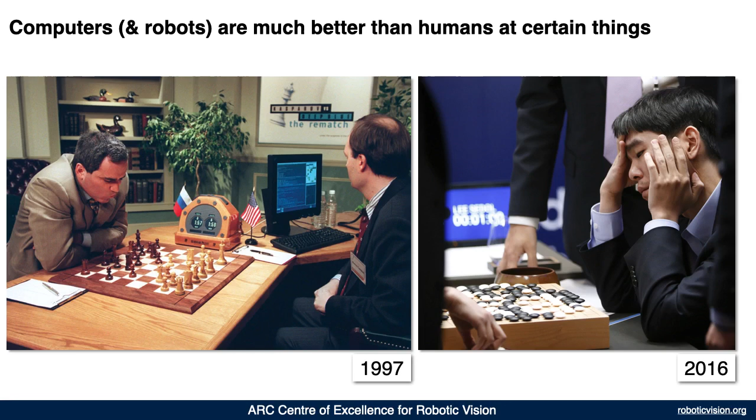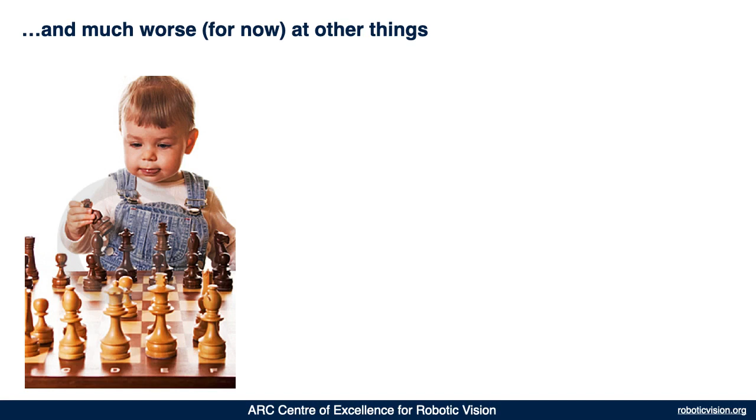If we look objectively at what computers and robots can do, we know for certain tasks they're awesome. For example, in classical board games, classical hard AI problems, they're way better than human beings at the game of chess, and more recently at the game of Go. But when it comes to tasks like hand-eye coordination, manipulation of objects, as shown here, robots are way inferior to very small children. Even if we could create a robot system to do this particular job of picking up these wooden chess pieces, if we then showed it different kinds of chess pieces, it's very likely that it would be confounded. It wouldn't have the ability to generalize, and that weakness is particularly apparent in its visual perception system.

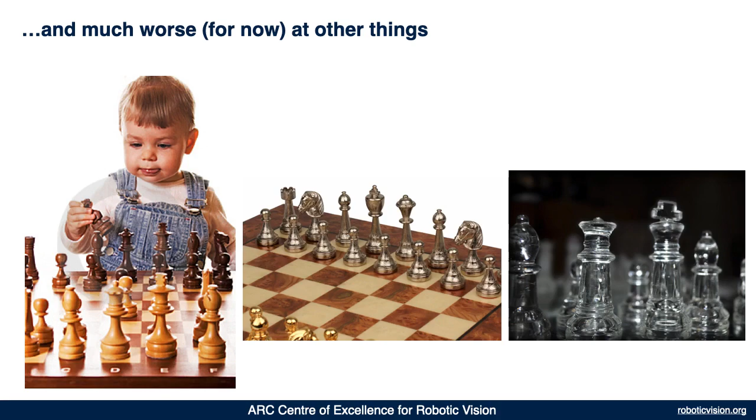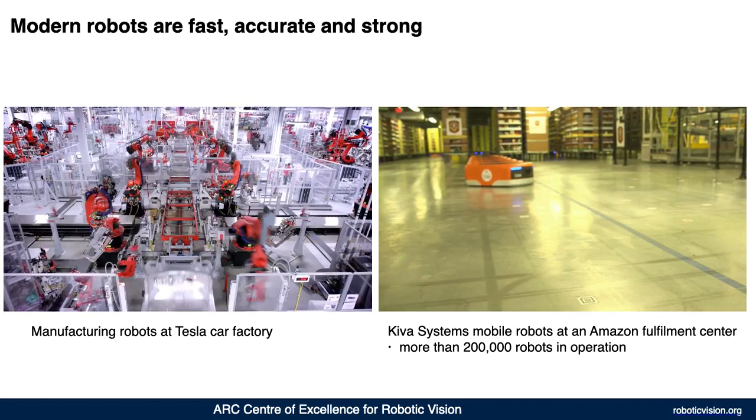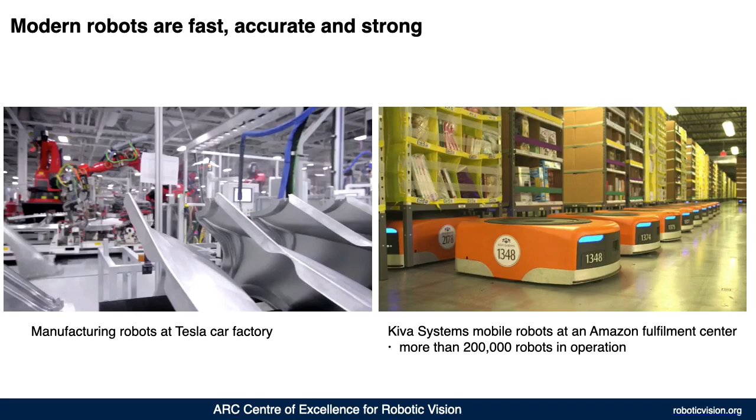If you look at the capabilities of modern robots, the capabilities of robot manipulator arms that are widely used in manufacturing, or you look at the new class of mobile robots used in logistics, they're very, very capable. The arm robot manipulators are fast, accurate, and strong, and companies like Amazon have built up massive fleets with hundreds of thousands of robots that power their business.

Yet despite the wonderful capabilities of these robots, we still see very low uptake of robots and automation technologies in many industries. So small batch manufacturing, particularly agriculture, which you could think of as food manufacturing, mining, building and construction, which you could think of as building manufacturing, and also tasks like hospital logistics.

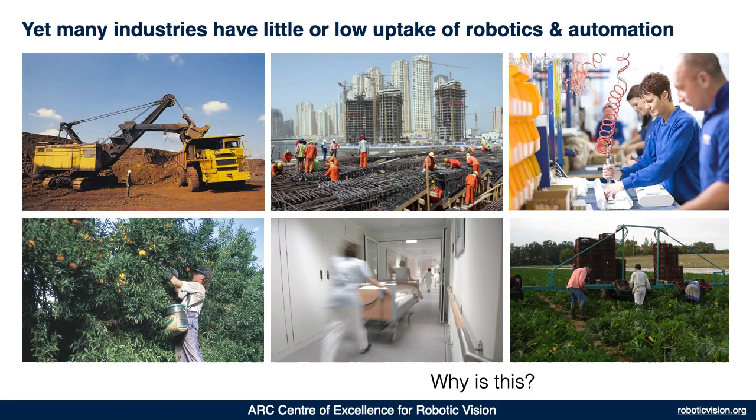So you have to ask the question why, when robotics is a 60-year-old technology, are there so few robots in the world? There are perhaps a few million robots doing manufacturing, there may be a few tens of millions of robot vacuum cleaners, but in many areas of our economy that are particularly important, we're not seeing very many robots at all. So I would argue that what's missing is the ability of robots to perform hand-eye coordination.

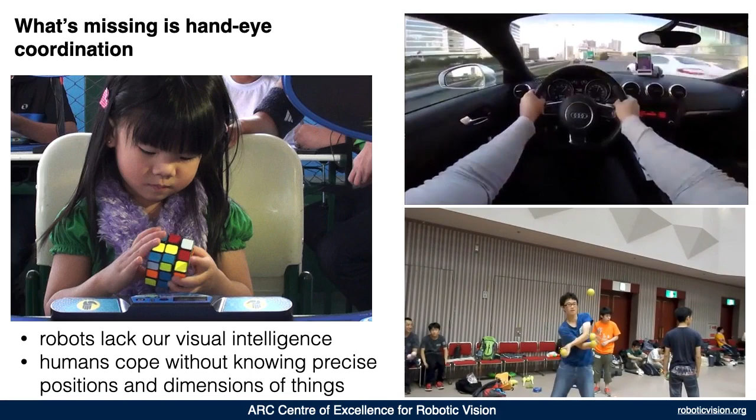It's something humans can do wonderfully well in all sorts of different tasks that we turn our minds to. So here are some very extreme examples. The young girl on the left is solving a Rubik's Cube. She is looking at the cube with her eyes, building up a mental model of the cube, reasoning about how to solve it, and then using her hands to manipulate the cube to the desired end goal.

The driving example here, the human driver is perceiving the world through their eyes, and then they're actuating the car through their hands and their feet. So really this is a closed loop system, and a critical part of that closed loop system is a human performing hand-eye coordination. And down in the bottom right, you see some examples of human beings doing juggling.

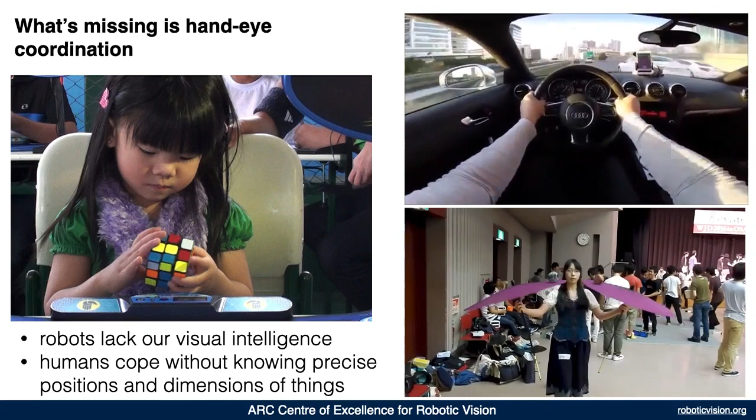This is a very, very dynamic activity. They're using their eyes to assess not just where the objects are right now, at this point in time, but where the objects will be into the future. It's a critically important part of doing these dynamic activities successfully. Our visual system is actually very, very good at predicting where things will be in the future. I'd argue that that has a huge survival advantage to know not just where the tiger is, but where the tiger will be in the near-term future. That's very important for survival of all animals.

Another thing I like to talk about, kind of a pet peeve of mine, is that humans routinely solve problems like this without any knowledge of the pose of the objects involved. So most of us can thread a needle, put a very fine piece of cotton through a fairly small hole in a needle, and we do that without estimating the pose of the needle or the piece of cotton. But if you gave this problem to a roboticist, the first thing they would probably try to do is estimate the pose of these things and then come up with an algorithm that moves the end of the cotton to the pose of the hole in the needle and therefore solve the problem.

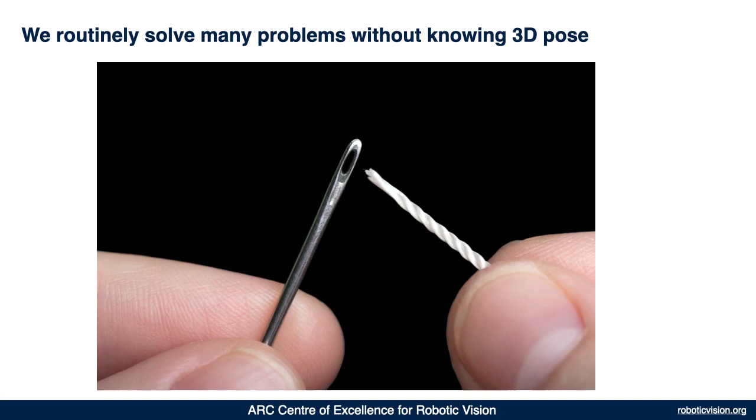It's a complex way to solve it, and I'd argue that it's not particularly robust. The way that humans do it is actually more robust, and I'll come back to that in a moment.

A key aspect of hand-eye coordination is clearly the eye. The eye is a biological technology, invented about 540 million years ago, relatively late in terms of life on planet Earth. But when vision appeared, evolution took a big step forward, leading to a huge explosion in species known as the Cambrian explosion. There's an interesting theory called the light switch theory, which suggests that the arrival of visual capability in organisms led to an arms race between predators and prey that drove rapid evolution and exploration of different forms and features of creatures, leading to the richness we see in the world today.

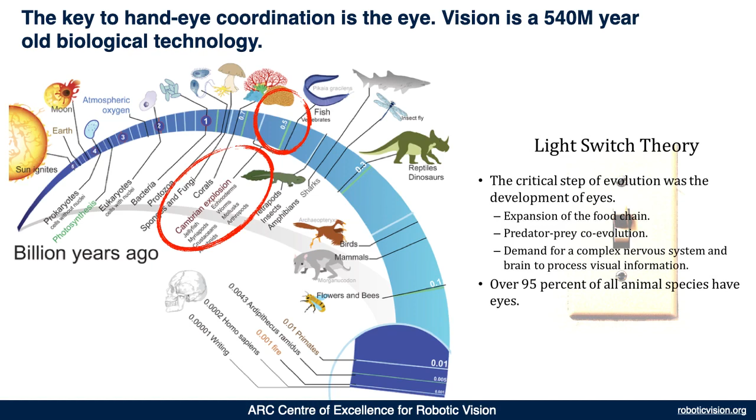Eyes today are everywhere. Not all creatures have eyes like our own two eyes. There are creatures with many eyes, formed on quite different principles. Our eyes are based on lenses, but some sea creatures have eyes based on reflective optics, not refractive optics. There are probably 10 different eye designs on the planet, and 96% of all species have eyes. So eyes are the secret sauce really for doing hand-eye coordination.

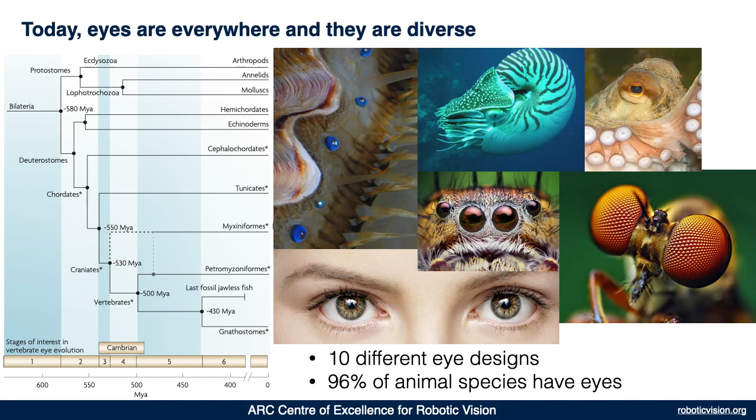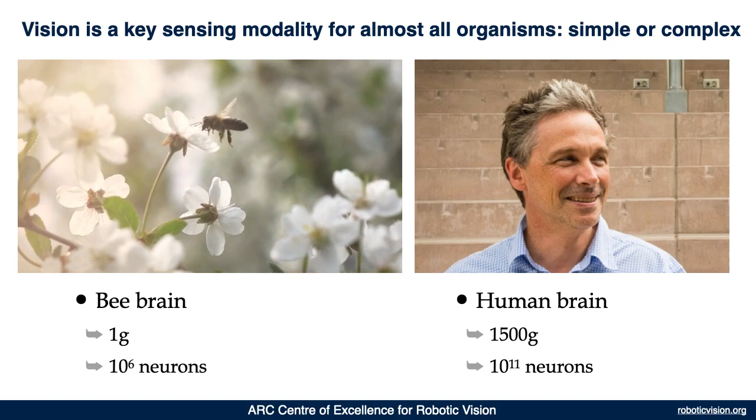The other critically important part of hand-eye coordination is the brain, which processes the visual information. For ourselves, we've probably got a pair of 100 megapixel cameras in the front of our head, and a large brain, 1,500 grams of grey matter, 10 to the 11 neurons, about a third of which is dedicated to visual processing. But even very small and simple creatures like insects, the bee shown here has a brain that weighs just a gram, yet you can see it performing a very complex body-flower coordination problem. An awesome skill with very, very small computational resources deployed.

If we look at the traditional way a roboticist might tackle this, we would have a control system with sensors that tell us where the joints of a robot are, and we perform forward kinematics and inverse kinematics to drive the end effector of the robot to a desired point or pose in the world. The robot doesn't actually know where its end effector is; it's inferred from joint sensor measurements. The robot also doesn't know where the object it's working on is, so it can't do hand-eye coordination. It can't move its hand to minimize the distance between the hand and the object it's working with. It's all done by inference.

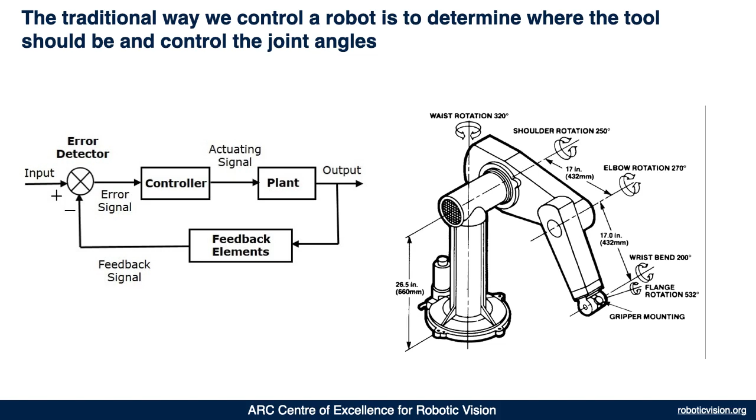A manufacturing engineer is very good at arranging the working environment of a robot manipulator arm so that it can perform useful tasks even if it can't actually see where the objects it's working with are. It's all done by relying on absolute precision. That's in contrast with the way human beings solve tasks by hand-eye coordination, moving our fingers so that the piece of cotton moves through the hole in the needle.

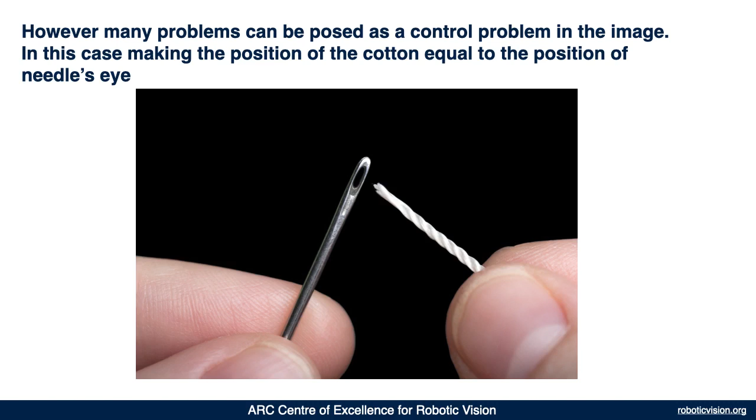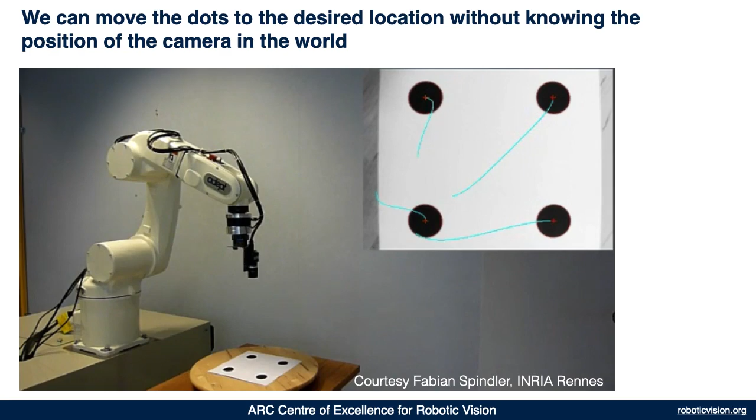In robotics, this is a problem that has been tackled. If you look at the top right, there are 4 faint crosses, and what you'll see is the robot moving the camera so that the centers of the dots become aligned with the crosses. This is a technique we call visual servoing, and I'll repeat the video so you can see it again. So what this robot is doing is moving its camera to make the image into a desired state, and this is what we do — this is an example really of hand-eye coordination.

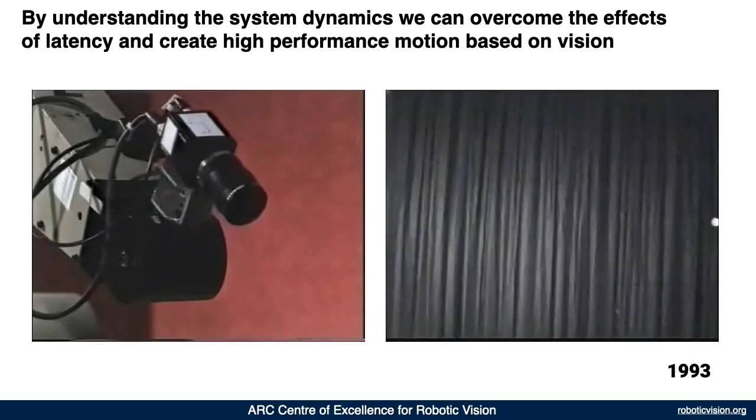That last example was rather slow, but if you take account of the dynamics and the latency in the system, you can actually perform quite high performance visual servoing. This is some work I did a long time ago, showing a robot with a camera tracking, on the right hand side, an object falling under the influence of gravity, and on the left hand side, tracking an object moving with a quite significant acceleration profile on a turntable.

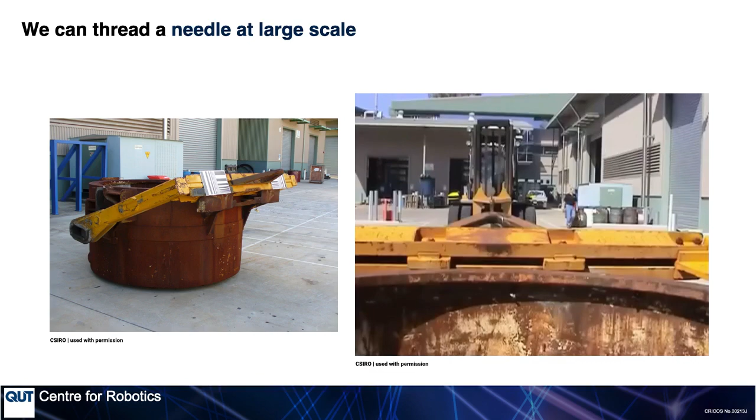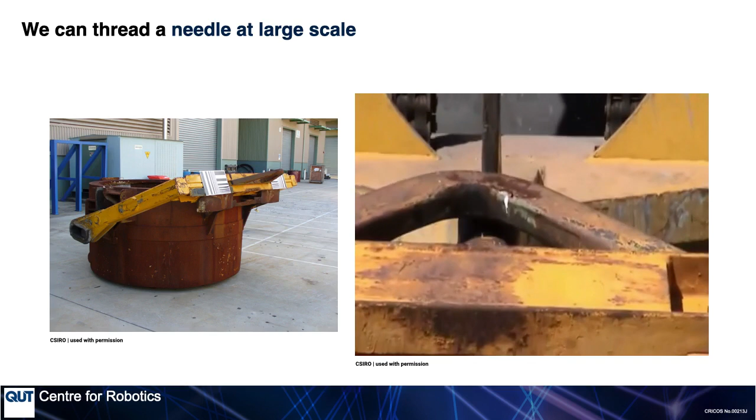And so we can do a task like the needle threading task on a much larger scale. So this is some work I did when I was at CSIRO. And we have a forklift truck with a hook. And we use cameras to guide the forklift truck so that it can put the hook through the handle on this large crucible and pick it up and move it around.

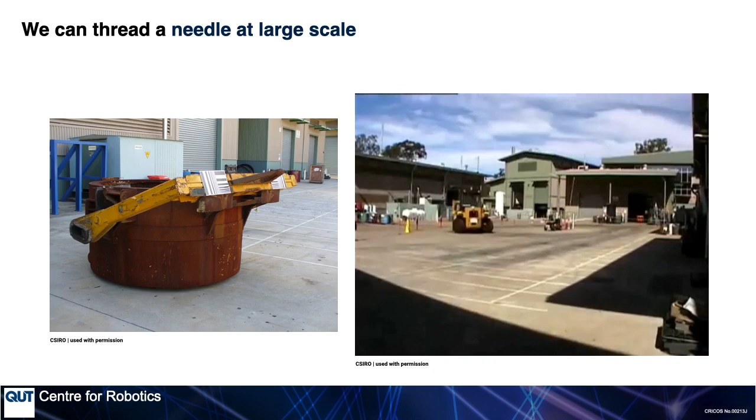And here's a trial we did over the course of a whole day where we just picked the crucible up, moved it to a random location, dropped it, picked it up, and moved it to another random location. We did this over and over again to give some idea of the reliability of this approach, which does not rely at all on the absolute pose of the vehicle or the absolute pose of the crucible. It's all done by relative positioning.

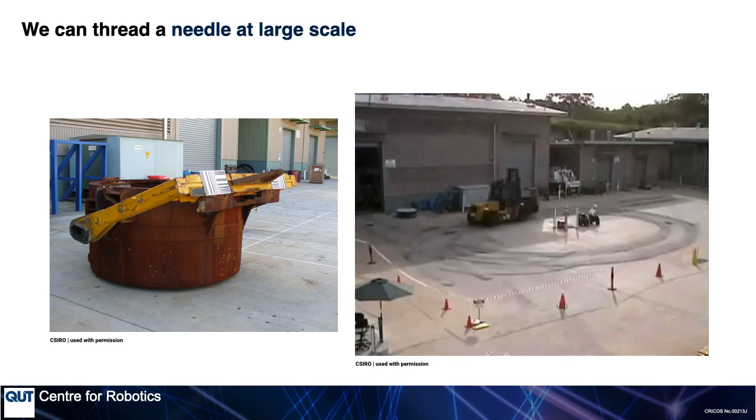And you can see in this case we cheated. We put some barcodes on the crucible, but I think today we have vision techniques that would allow us to do it without using codes like that.

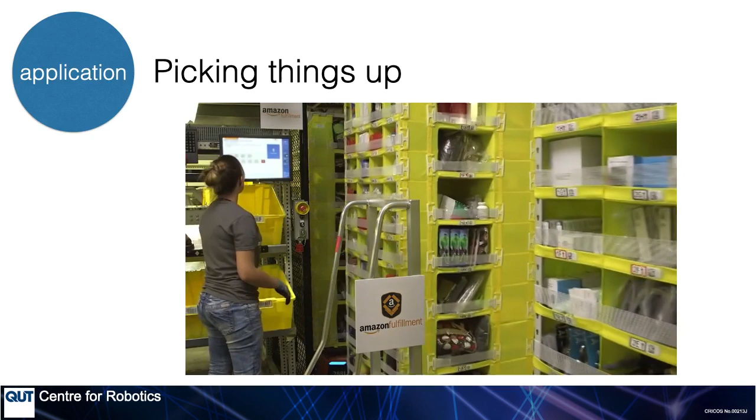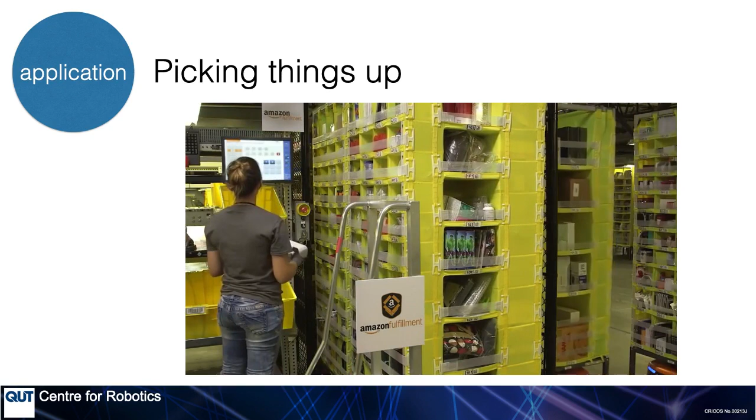So we got interested a few years ago in the task of picking things up, and particularly motivated by this problem from logistics where fleets of robots move these shelf units around a fulfillment center, but we need a human being at the end to take the items out of the shelf units and put them into the packing boxes which go to the customers. And that's really because humans have got the required level of hand-eye coordination to do this complex task of taking the objects out of the shelves.

So Amazon pitched this problem as a competition, and our lab entered for the first time in 2016, and that was probably the second or third year of the competition. And our first entry was a Baxter robot with a not particularly well-engineered vacuum gripper that reached into the shelf units and attempted to grab the items. It was problematic for all sorts of reasons. It was a great learning experience. We came sixth in the competition, but there were many things that we learnt.

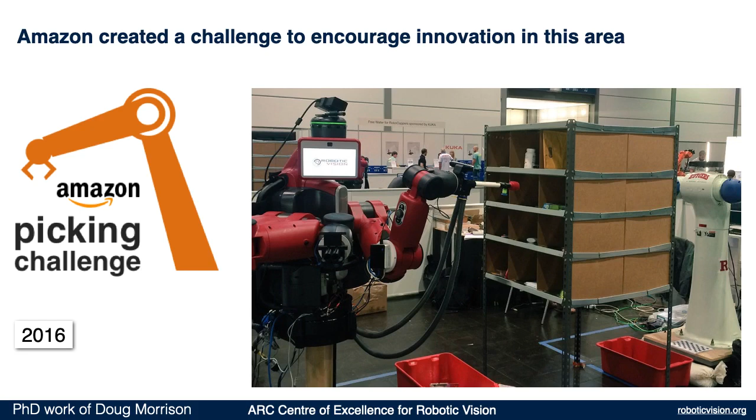It had 2 grippers. And so we learned that suction grippers are very, very versatile. They can pick up a lot of objects, but there are some problematic objects in the Amazon challenge which cannot be picked up with a suction gripper. And so we ended up with a robot with 2 grippers, a standard 2-finger pinch gripper and a suction gripper.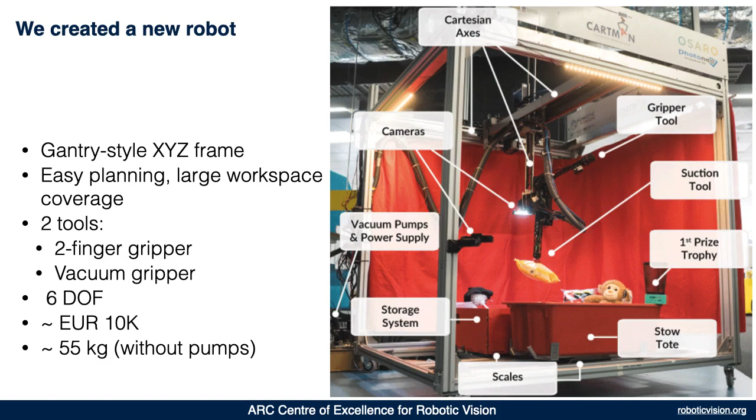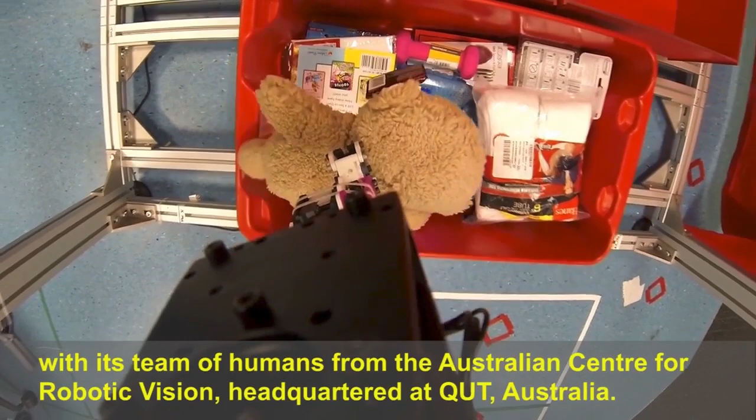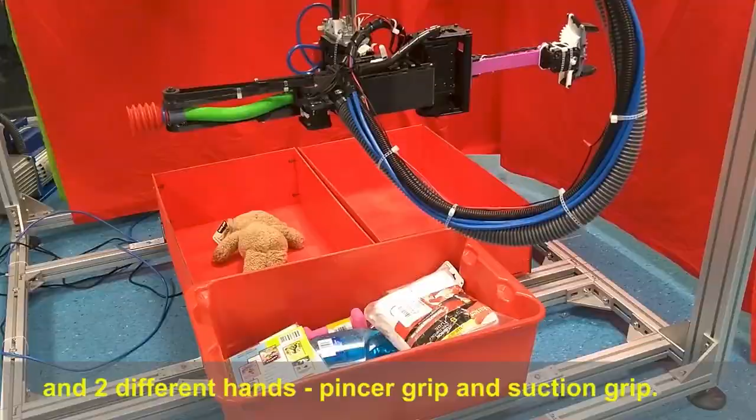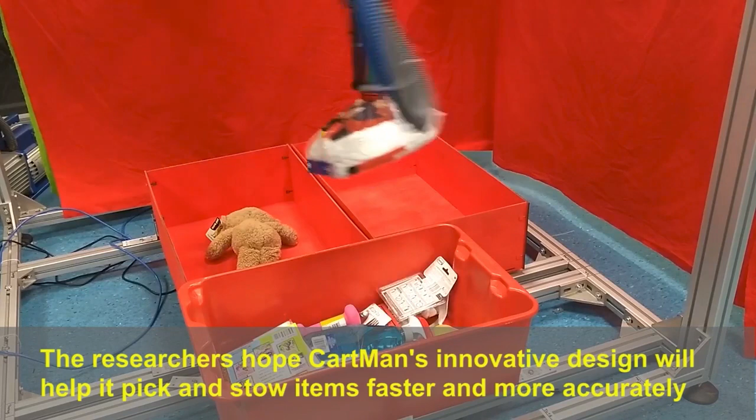Here's a video showing the robot at work, and here you can see it's got its 2-finger gripper downward. It's reaching into the bin and picking up a soft object. It's going to pick that up and drop it into one of the output totes. You see the robot now is going to rotate its hand around to deploy the vacuum gripper, which is going to come down and pick up this plastic bag of socks and put that into the output tote as well.

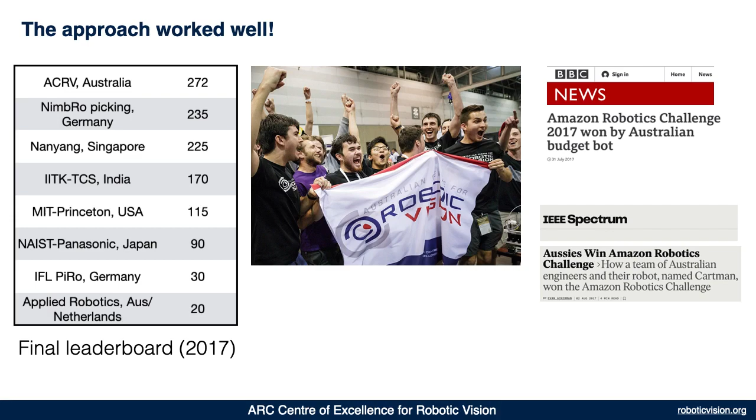So the combination of the robot and of the RefineNet gave us an approach that worked very, very well. We won the competition in 2017, which we're pretty happy about. And that then led really to two different developments within our lab. The first development actually was a spin-out. So one of my postdocs, Jürgen Leitner, took the technology that was developed for the Amazon Challenge out in a

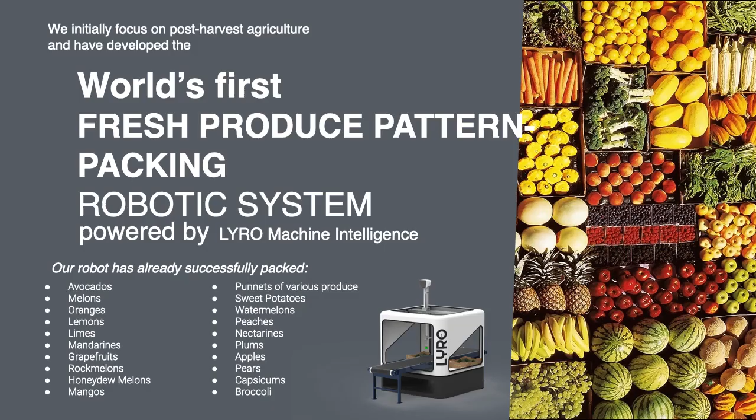company called Lyro. And Lyro's focus really is on picking and packing uneven sized and shaped objects, particularly natural products or fruit. And so they've been able to demonstrate wonderful results in terms of picking and packing these products. And at this point, I should declare that I have an interest. I am an advisor to Lyro Robotics.

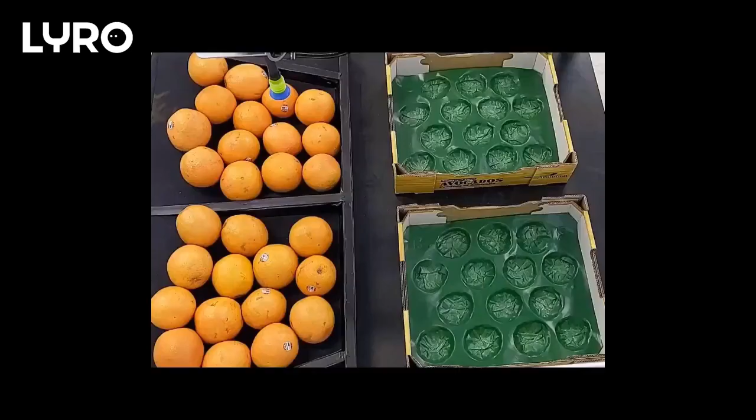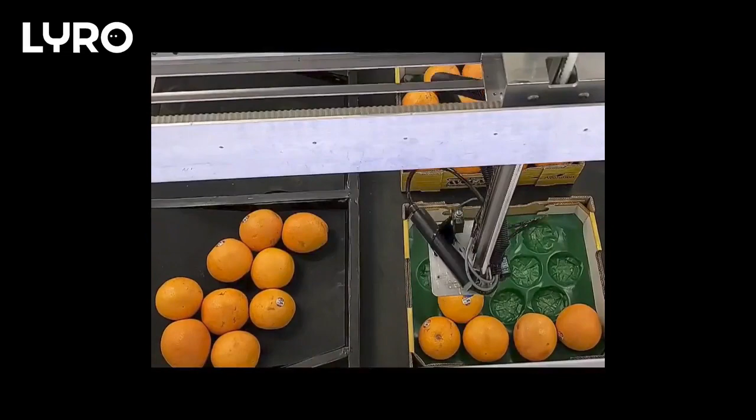Here's a video of the Lyro robot picking oranges and putting them into a packing container. So this is a task that's done not in factories but in packing sheds on farms, and it's one where at the moment there's very, very little automation deployed. And certainly in Australia we have significant problems with getting labour in these rural areas, and that's massively exacerbated by COVID.

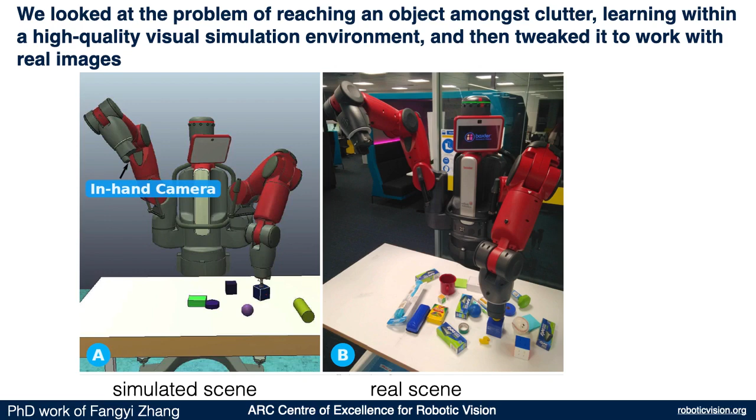This network takes in an RGB image and outputs a set of joint velocities. So there's no inverse kinematics in here, there is no planner, there's no PID control loop. It's image in, joint velocities out, and then we send those straight to the Baxter robot. So here it is running.

You can see the hand camera up in the air at the back, and you see the other hand which is relentlessly reaching for the blue cube. And Fangyi's moving it around, changing the configuration of the clutter. The robot is really quite relentless. Now I have to say that all this controller can do is reach towards a blue cube. So it has only a single skill. But I think it's fascinating what we can do with reinforcement learning with a network that takes an image and outputs velocities directly to the robot's joints.

Another area of research that kicked off after the Amazon challenge was looking at grasping. So what I showed you before was reaching, it's moving toward the object. Next bit is how do we actually pick it up? And the traditional approach is you take a depth image of the object, you propose a number of sample grasps, you rank them, you choose one, and now it's often quite time consuming, might take a second or more, and then you execute the chosen grasp, generally open loop. And that implies then that your object has to be stationary.

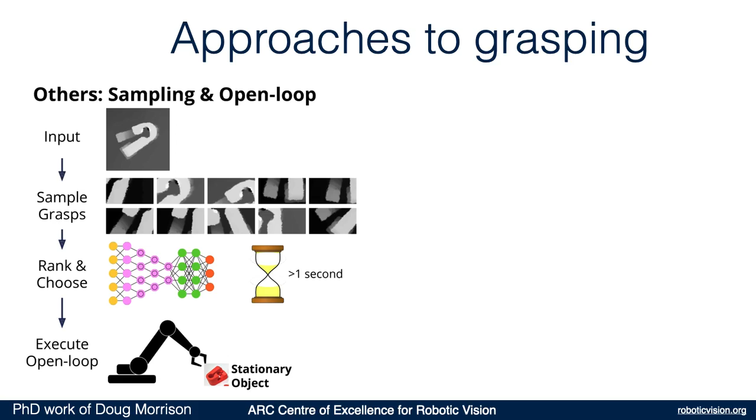So my student Doug Morrison looked at this and he came up with a generative neural network that takes a depth image and outputs 3 images. One is a grasp quality map, one's a grasp width map, and one is a grasp angle map, and I'll show those here. So the depth image leads to these three output images, and the grasp quality image is essentially a heat map. So where it's darkest indicates the points in the image where the best grasps are to be found.

And if we look up the corresponding pixel locations in the grasp width image, that tells us how far apart our fingers should be to execute that grasp. We look up the corresponding pixel in the grasp angle image, and that tells us the orientation of our fingers required to execute the grasp. So we look at the output images, we choose the best grasp quality, and then we look up the width and the angle, and we get the robot to do that.

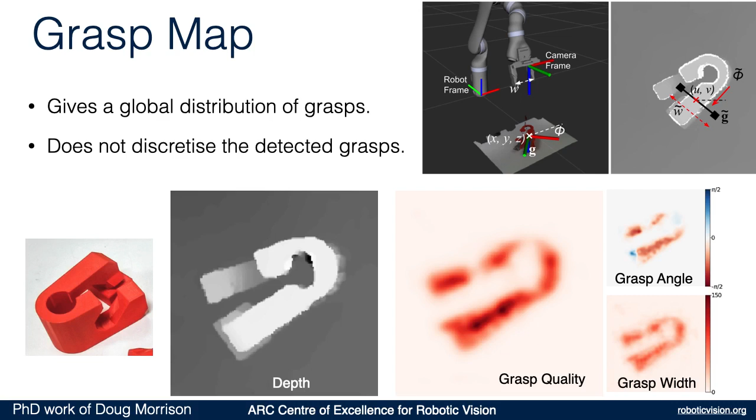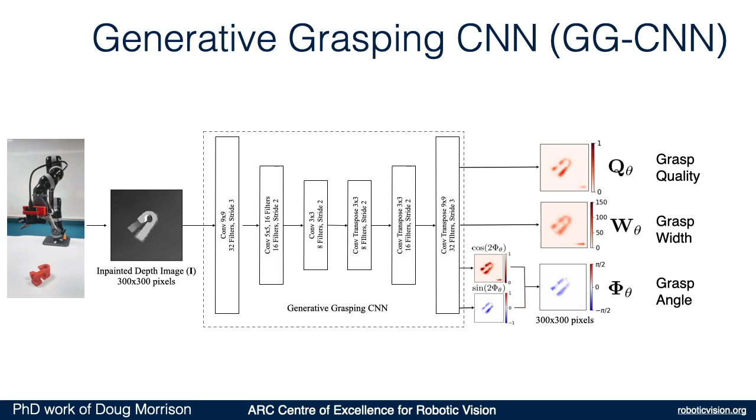Now this network gives us these images at a rate of about 30 Hertz, so we can do it while we're reaching toward the object. And once again, it is a deep neural network. It's trained from a number of standard grasping data sets. And here you can see it working. You can see the object moving around. The dot indicates the point of highest grasp quality, and the coordinate frame on the very rightmost image here is indicating the position and orientation of the fingers to achieve that best possible grasp.

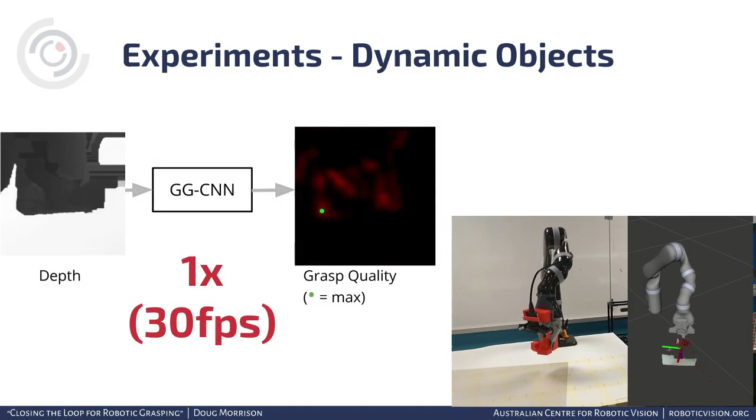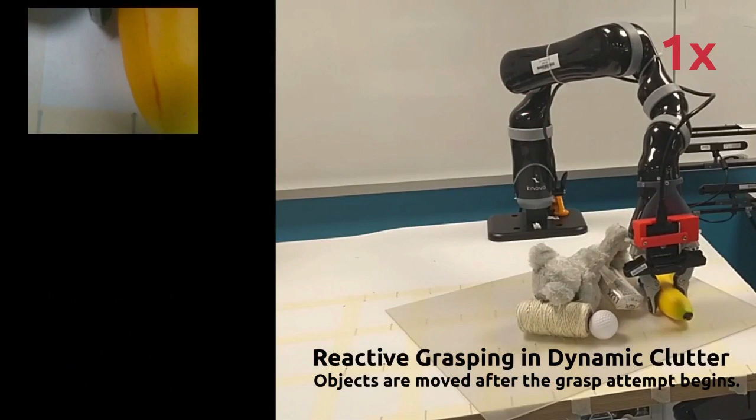And here you can see it's reaching towards an object that's moving, sliding down and grabbing it. And another example of the robot reaching amongst clutter. So the robot isn't being programmed to pick up the banana, it's really being programmed to find the most graspable object in the scene and pick it up.

Now, one of the challenges with this work is that the RGB-D sensor that we have on the end of the robot has got a limited working range. And you'll notice in all these examples, we stop moving the objects some time before the robot comes down for the final piece of the grasp, right? And the reason for that is that the RGB-D sensors have got a minimum sensing distance.

It's about 16 centimeters. And so if the camera is closer than 16 centimeters, there is no depth image available, and therefore we can't synthesize a grasp. So we have to stop moving the objects before the robot is closer than 16 centimeters. So it's kind of a serious limitation.

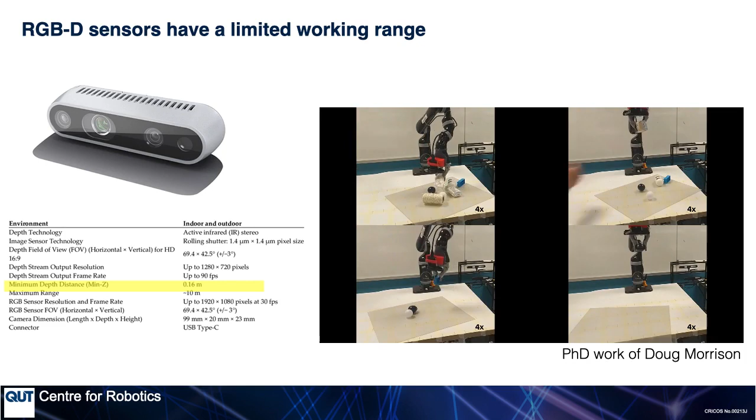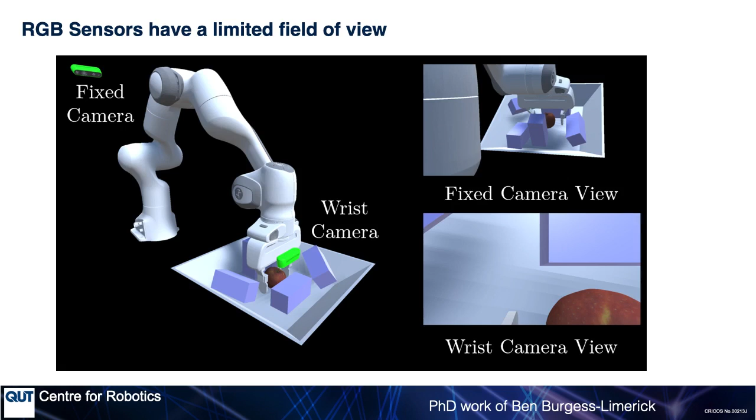So that got us thinking then about the problem of where should we put the cameras. And traditionally the cameras have been either placed on the wrist or they're being placed at a fixed location within the scene. But if the scene's got clutter, then neither of these locations are particularly optimal. And these renders here show some examples of what the scene looks like from a fixed camera view or from a wrist camera view in the presence of clutter.

And it occurred to us that the problem of grasping, like the problem of threading a needle, is all about where are the fingers relative to the object that we're trying to pick up. And so we call this the last inch problem, and we figured the best place to put the cameras is really close to the fingers, looking at the fingers and the objects themselves. So we've come up with this two camera configuration shown here with overlapping fields of view. And this is the work of my student Ben Burgess-Limerick.

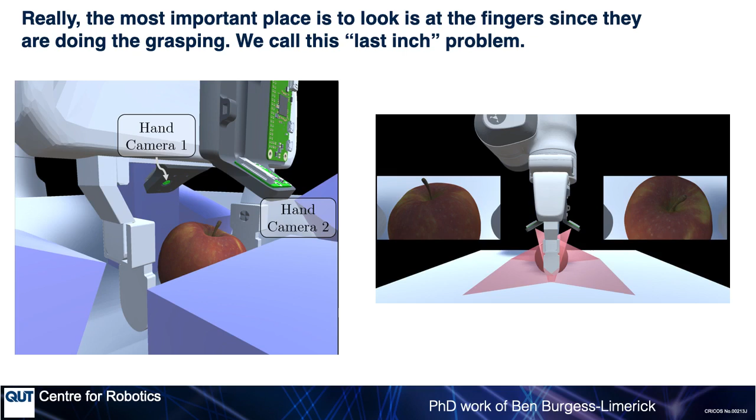Now you might say that rapidly moving objects is not a very realistic problem, but in a lot of manufacturing situations we do have objects that are moving. On conveyor belts, the objects move in a very predictable way, but fruit rolling around on a belt moves in a very unpredictable way.

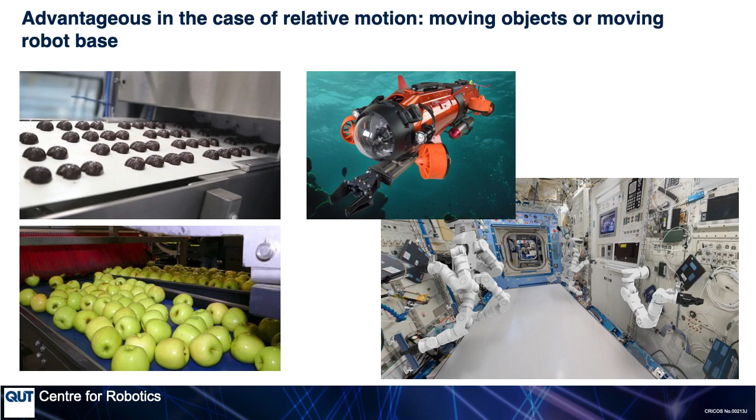And if your robot arm was mounted on a moving platform, for instance, an underwater robot or a free-floating robot on a space station, then we have the base of the arm moving around, and it's the same problem, really, as the objects moving around and the base of the arm being fixed. So we think this is a problem that has actually got some quite general applications.

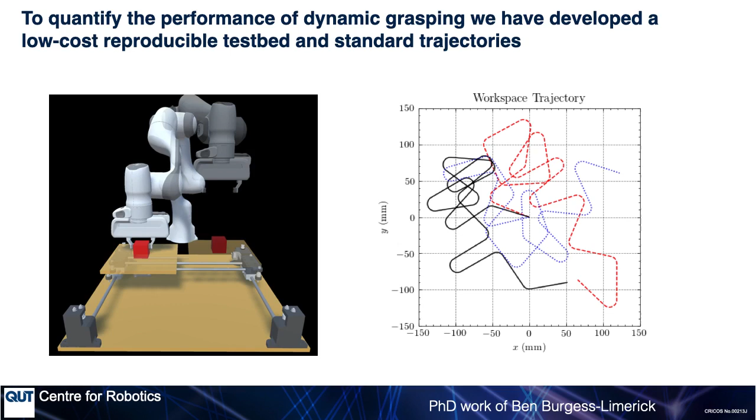So to investigate the performance of robot grasping algorithms in the presence of dynamic objects, we built a low-cost testbed that's easy to reproduce. We've come up with a number of standard trajectories for the table that holds the object, and here I'll show you some examples of this in action. So the rig in the foreground is the platform, which is driven by two motors, so it moves in the X and Y direction, doesn't rotate.

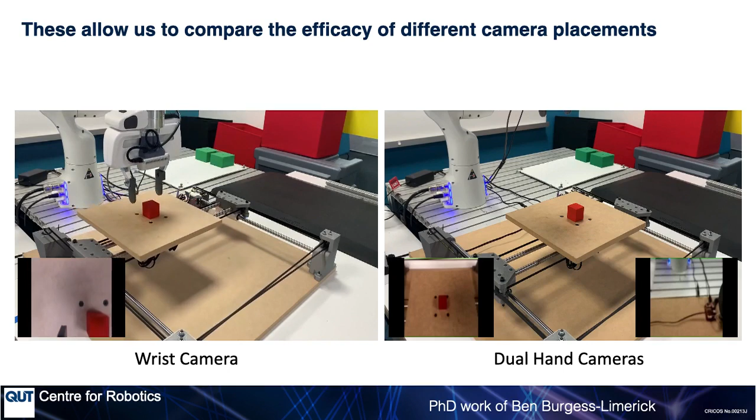And now what you're going to see is the robot moving, and it lost track of the object. The object suddenly moved backwards, and with a single camera view, it went out of the view of the wrist camera, and the grasp was unsuccessful.

Whereas if I run the grasper using the two hand-based cameras, it almost always has the object in its field of view and the grasp is more successful. So if we do trials over a large number of grasps, it's very, very clear that the dual hand camera approach is much, much more reliable than the wrist camera approach. And this is a simple case with just dynamic motion of the object and doesn't include any clutter.

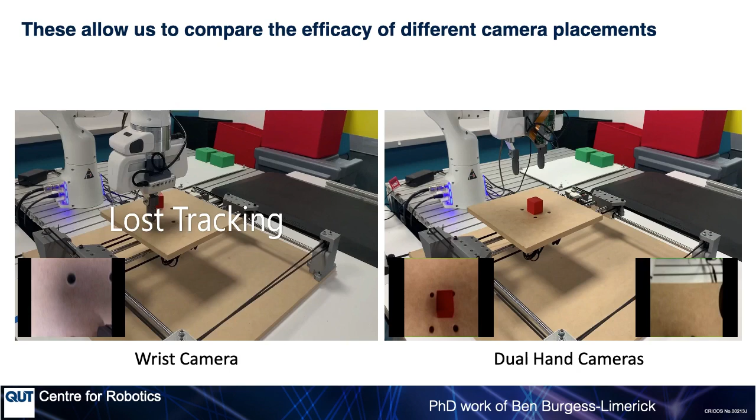The final piece of work that I'd like to talk about is a test bed, and this is work done by my PhD student Jesse Haviland, of combining some of these technologies into a mobile manipulation platform. And what we see here is fairly graceful and seamless motion of mobile base and an arm working in harmony using the grasping technique that I showed earlier, and it's just moving objects from one tote to another.

The control of the arm and the base is done by a single control framework. It's framed as a quadratic program. The arm is maintained in a pose of maximum dexterity, far away from joint limits. It avoids collisions with objects, and it has the ability to detect when it's failed, and it will retry.

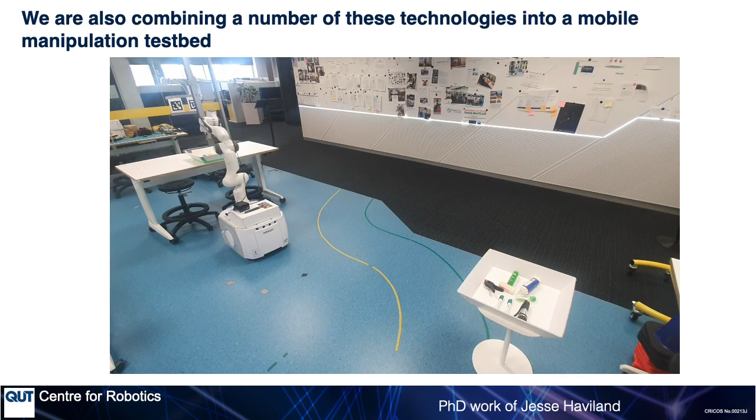What I like about this work is that it's done largely using reactive control, and it's very, very graceful. There are no long pauses for motion planning, and the motion you see of the base, the way it does its reversing as it's moving from one tote to the other, is not pre-programmed. There's no trajectory generator there. That's an emergent behavior of the control law that we've programmed.

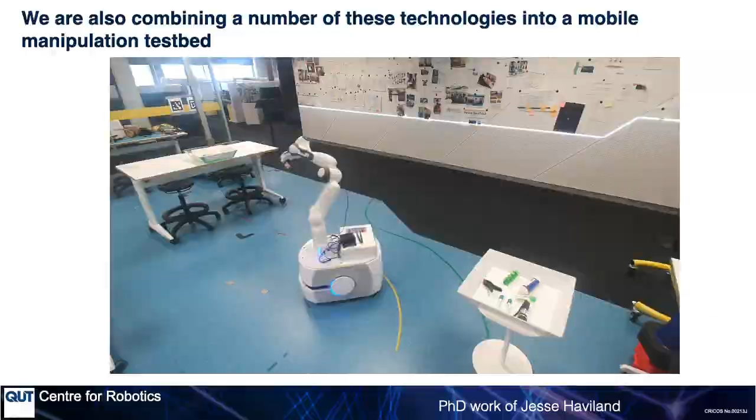Final application I'd like to talk about is in fruit picking. And this is with fruit that's still on the bush, and here we're picking capsicums or red peppers. We have an RGBD sensor on the end of a UR5 robot. On the left-hand side, you see colored point cloud that we put together by moving the camera to a number of different viewpoints. We can fit a shape to it, we can find its pose, move towards it with a vacuum gripper, sever the stalk, and we end up with the fruit hanging in the hand of the robot. We can drop that and then reset.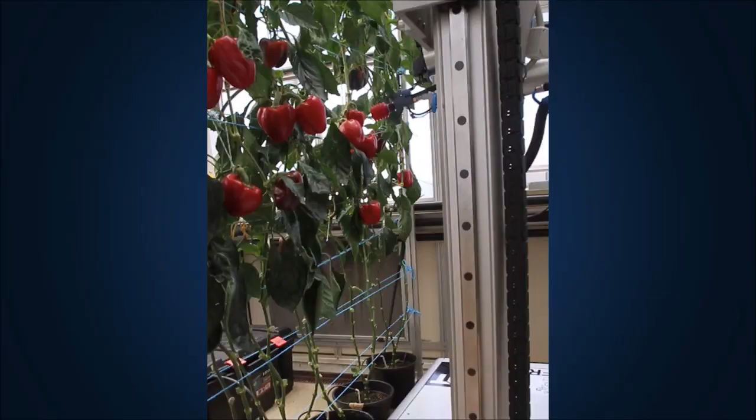So this has also led to another direction of work, if you like, in greenhouse automation. And what I think will be an important trend in the future is essentially indoor food factories. That these would be city-based facilities packed full of plants and robots that are producing fresh food right where it's needed, rather than having to be transported over large distances from the countryside.

So, some take-home thoughts. Hand-eye coordination is a very important skill that's applicable to many tasks. Human beings are awesome at hand-eye coordination, and I think we're proof that a robot with just one or two cameras could be very, very capable. Because if you're very reductionistic about it, we are essentially machines with one or two cameras, big brain, and some fantastic manipulating hands. For robotics, this capability is still quite immature. So the challenge for us as researchers is not just the cameras, it's understanding how to process the data and integrating that into a robust control framework.